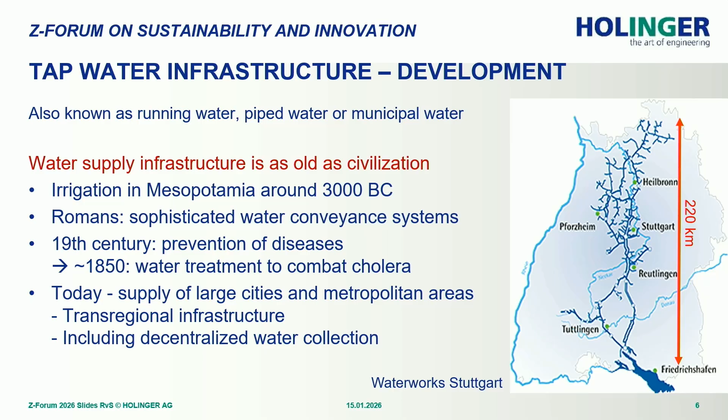Water infrastructure is as old as civilization. The first infrastructure is in Mesopotamia, we know, 3,000 before Christ. So it's something that we need the water, and we bring the water to the consumer or to the agriculture. That's as old as our civilization. The Romans, you all know, they have very nice bridges built and tubes and everything. And now in the 19th century, we realized that our health is directly correlated to the water we consume. It's rather young information we have.

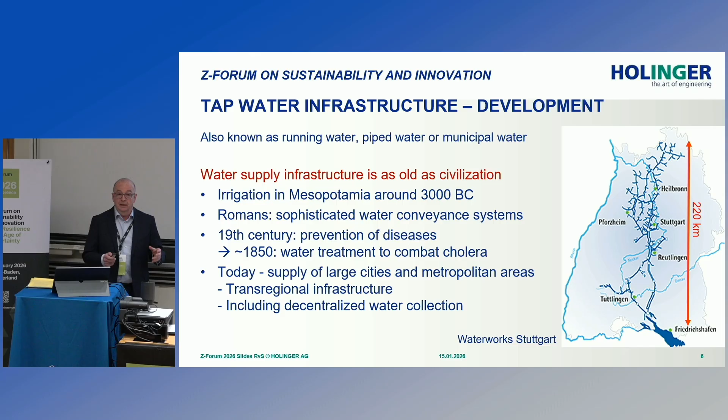So in 1850, the first water treatment was made. And today we supply large cities and metropolitan areas with a very complex system. What you see on the right side is the waterworks Stuttgart infrastructure. It starts at Lake Constance and goes up to 220 kilometers, and you see all these branches. So you have a system that is on one hand centralized where it is used, and you have a lot of decentralized places where the sources are. This is all connected to each other, and that makes a very complex system.

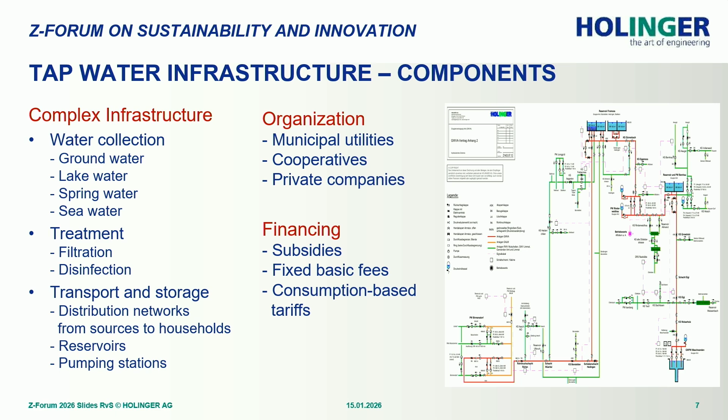I won't go into details, but you have the water collection like groundwater, lake water, spring water, seawater also in arid areas. You have treatment, filtration, disinfection, and then a transport system. It's a real luxury - in the morning you open your tap and the water comes out. That's food actually delivered from maybe 200 kilometers away to your house, and you just open it, and you don't really pay a lot.

Does anybody know how much you pay per liter? Probably not. It's not a factor in our life. It's something that is affordable. Not for everybody like this, but the transportation system that goes into every household is really very complex.

On the other side, we have an organization who needs to run that system. So the organization is very, very important. Usually it's municipal utilities, but we have a lot, at least in Switzerland, cooperatives. The French and some other countries tried it also as private companies, but with little success. We might discuss that maybe later.

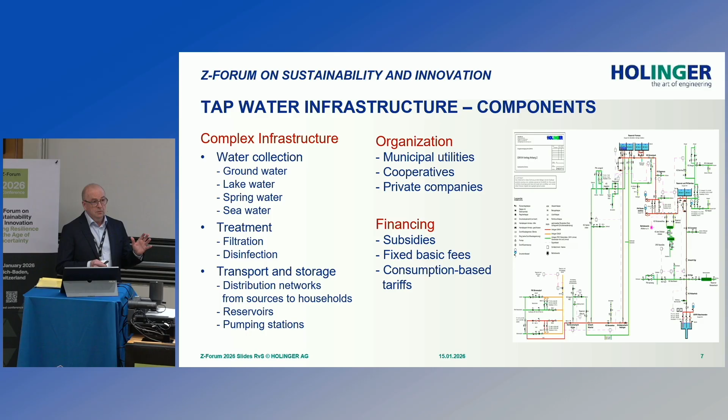Financing is also important. On one hand, we have to subsidize it - that means the state, federal government pays at least a basic amount. Then we have fixed base fees for the infrastructure and then consumption-based tariffs. So that's how we today finance the system, and it's also important whether that system is stable or not.

The crises we go through are exponential growth of urban areas, drought, floods, contaminants with microbes or chemical substances, system failures, power outages, but I guess we will also have some problems with cyber security on that system.

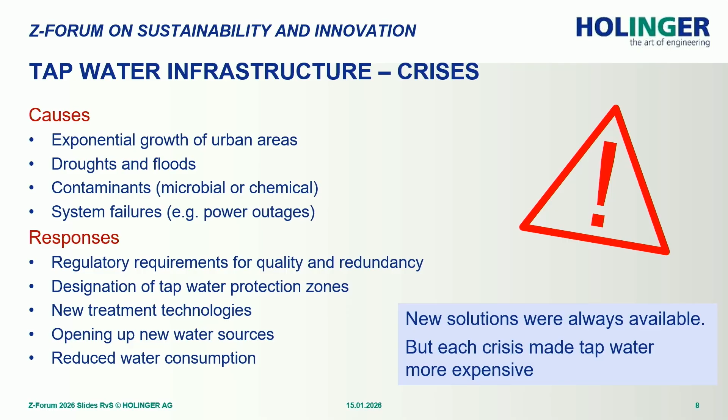So resilience for the future means, of course, we will need AI because we have a lot of reserves in the system, and we are going to use AI for using those reserves. The tubes are too big, actually - they are made for the peak, but we don't need the peak all the time. We need a more decentralized system, and water reuse is also going to be a topic in the future. Israel actually is very good in doing that already.

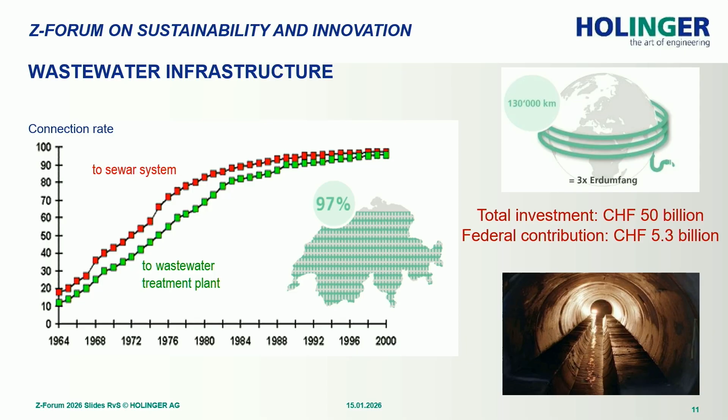So what was the response in Switzerland? In the 60s, only about 10% of households were connected to the sewer system and wastewater treatment plant. That changed dramatically until the 90s, where now almost 100% of the population is connected to the sewer system, with a wastewater treatment plant at the end. About 50 billion has been invested, and the federal contribution was about 10%.

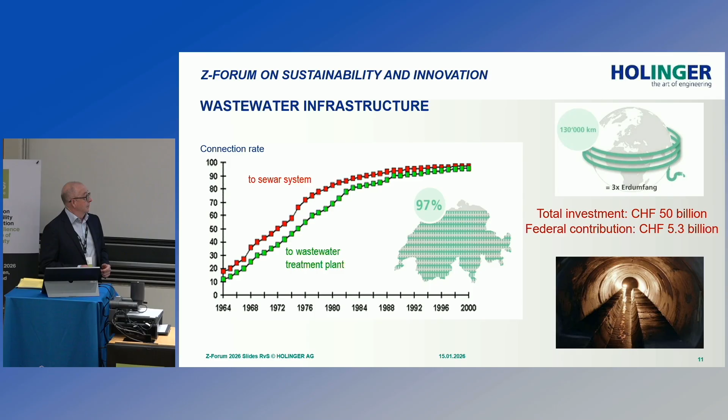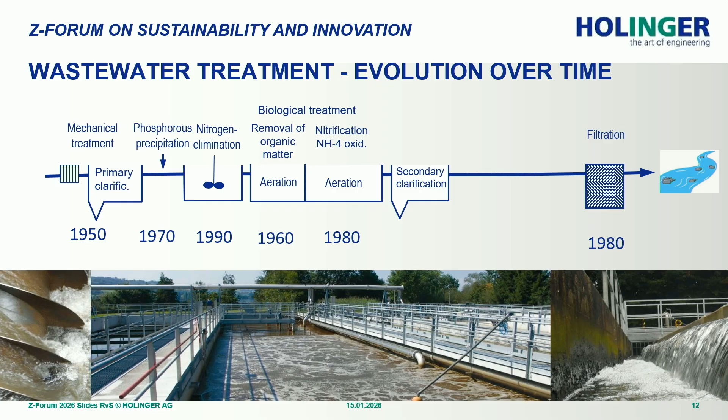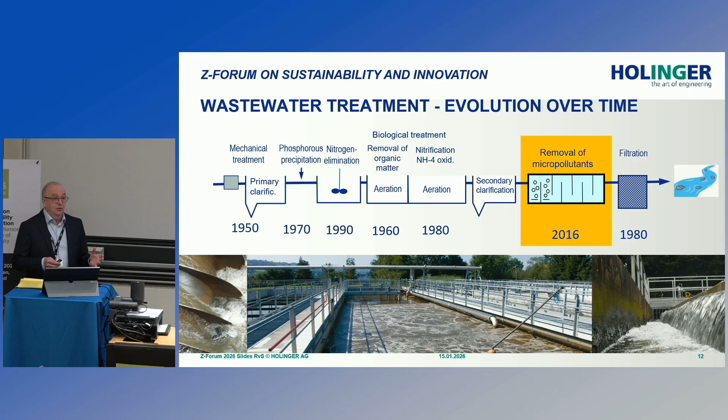Of course, the beginning wasn't very expensive, but the more you add, the more it costs. But there was a nice reaction to this.

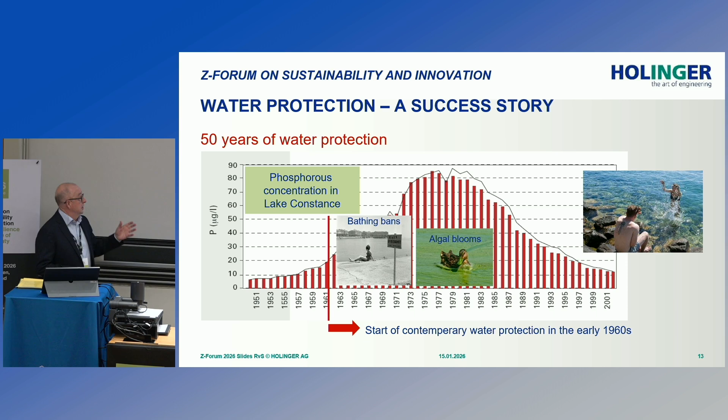In the 50s and 60s we had almost no phosphorus in our lakes. Phosphorus is the growth-limiting factor for algae, so when you increase phosphorus concentration in a lake, you get more algae - algae blooms. You can't swim anymore, and then you can see what happened. It's a slow system.

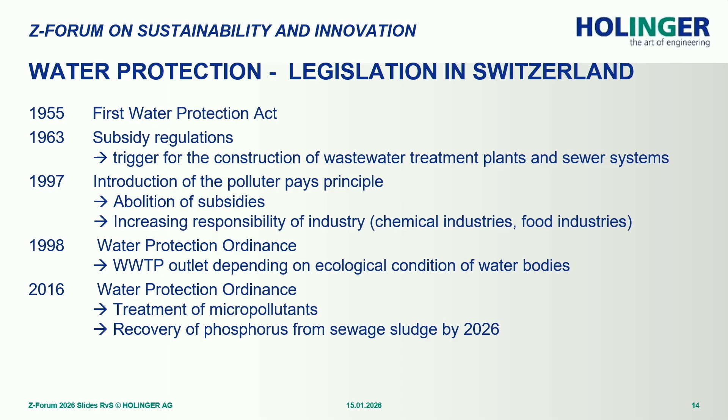What happened is we had regulation which helped push for more technical solutions and investments. The legislation was important, starting in the 50s and ending up now in 2016 with the Water Protection Ordinance, where treatment of micropollutants became law.

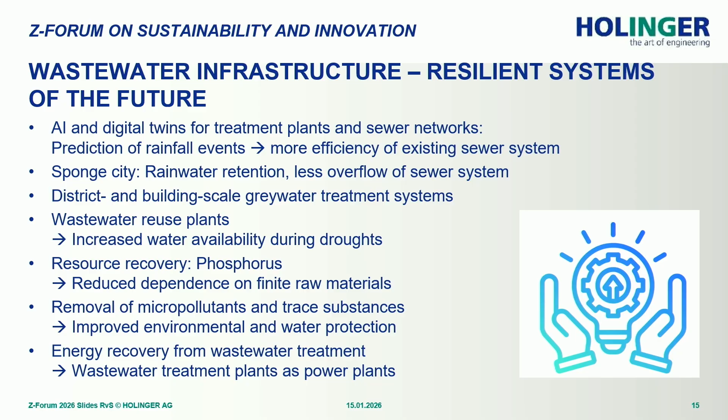So in future, once again AI will be interesting and important for more efficiency, sponge cities for rainwater - some of these words you might have heard before: phosphorus recovery, phosphorus as a source, micropollutants, energy recovery too. So the future is actually already here.

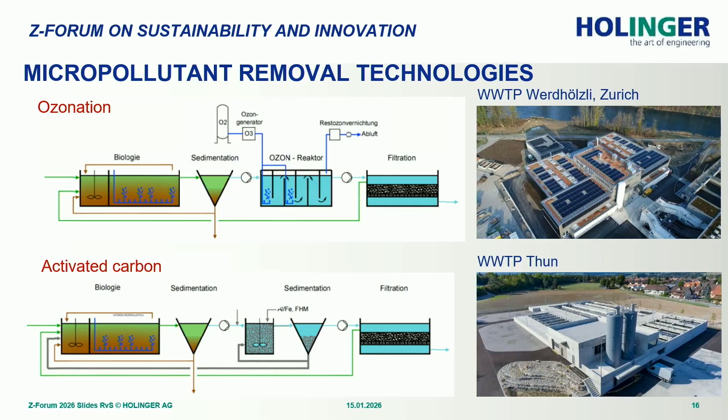We have micropollutant removal technologies, for example at wastewater treatment plants here in Zurich or in Thun - they use two different technologies. What you see here is a wastewater treatment plant, and behind it a tap water treatment plant. So we are very close - we take out the last 5% of the pollutant, which is of course expensive, but we use technology from tap water treatment in the wastewater treatment field.

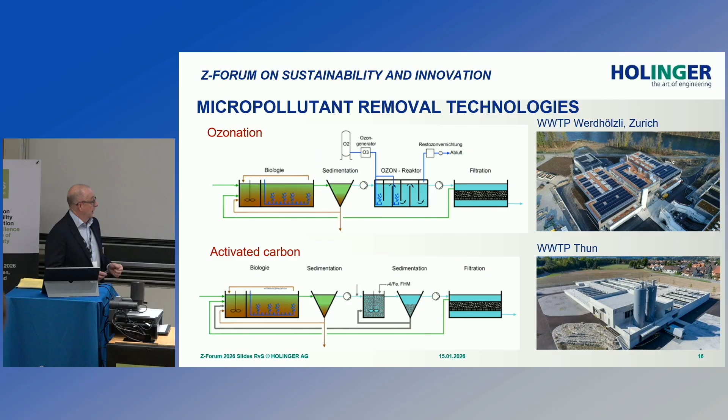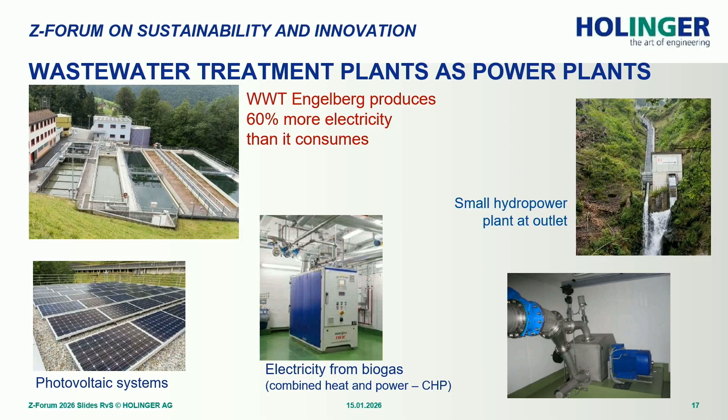Here's an example: the wastewater treatment plant of Engelberg, a tourist town in Switzerland, where we now produce 60% more electricity than the plant itself consumes. So the wastewater treatment plant is also a possibility to use as a power plant for producing electricity.

So what, all in all, are the success factors? Legislation is really an important steering instrument for development - it's an important trigger. Then high-class, practice-oriented universities - we've heard today how important it is to have an ETH, University of Zurich, here in this area for innovation, and funding of basic research. Basic research can't really be done otherwise - only chemical industry can afford basic research, but most has to be done on federal or canton level.

Then we have a combination of decentralized and centralized systems, and a healthy private sector. The private sector, Holinger, is the one who in the end built these plants and took the risk of implementation. And the financing structure must be in place.

That's also important. So in conclusion, to be resilient in the water sector, we need an approach that integrates technology, the environment, governments, and society as a whole. It's not just one single piece - we have to focus on all topics. That's about it. Super, many thanks.